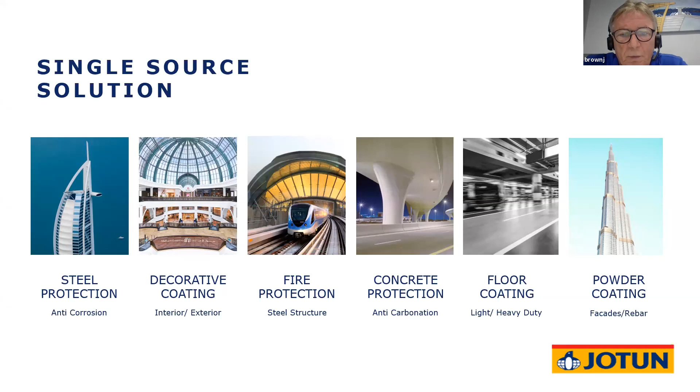So, fire protection of steel structures. What is the purpose of fire protection? Why do we need fire protection? The main purpose of fire protection, the primary functions, are to delay the building collapse, extend the search and rescue time, and preserve the life of the people in the building. The secondary function of fire protection is to protect structure and inventory and prevent a catastrophic failure of the building.

There's many different types of fire protection systems. There's active systems, passive systems, and reactive systems. If we look at active systems, they tend to be the sprinklers or halon systems that are fitted, and they're the first line of defense in a fire.

Passive systems can be vermiculite spray, cementitious spray, fireboards, or mineral wool. Cementitious and vermiculite spray is the most popular used in the Middle East, and these are used behind linings. Very effective and very easy to apply and relatively cheap, but unfortunately very ugly.

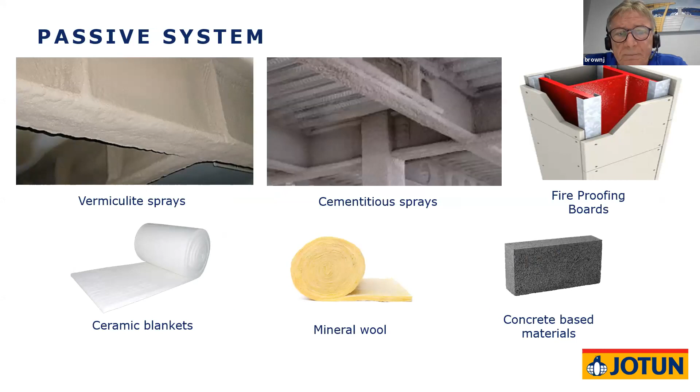So if the steel's exposed, we tend to use intumescent coatings. And then we have reactive systems, which are thin film intumescent for either cellulosic fires or epoxy intumescents for hydrocarbon fires. Today, we'll just be focusing on thin film intumescent for cellulosic fires.

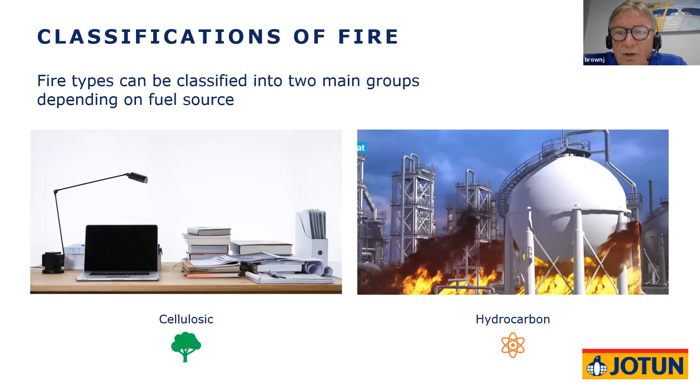A cellulosic fire is one that you would see in everyday buildings. In the office you're probably sat in today, shopping malls, airports - these are cellulosic fires. A hydrocarbon fire is a fire that takes place on an oil refinery or offshore oil rig. And today we're going to talk about fire protection using thin film intumescent coatings.

What is an intumescent coating? The word intumesce is a Latin word and it means to swell. It means the coating will swell and provide insulation to the steel and prevent the temperature rising in the steel.

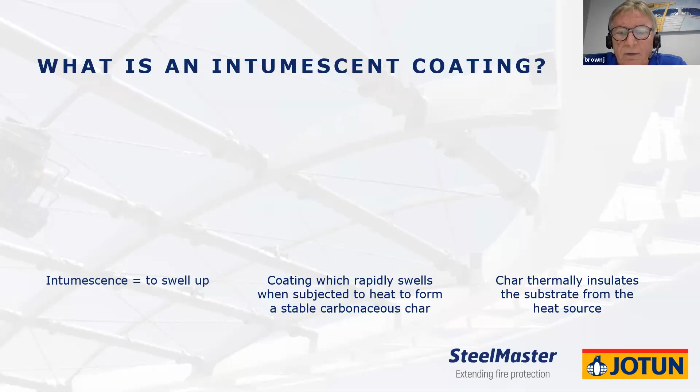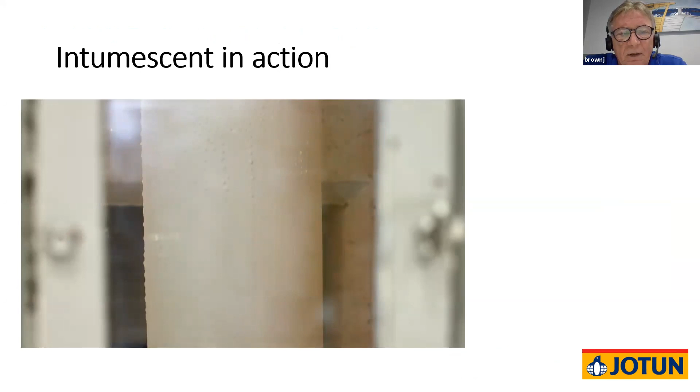Another short video. This was taken from our furnace where we do the fire testing, and you can see the initial reaction is it blisters and pops, and then it starts swelling, and this is acting as an insulation material. It's stopping the temperature of the steel rising.

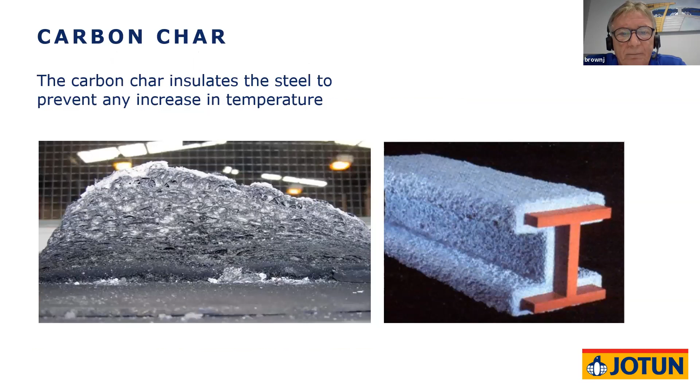After the coating's finished, we're left with something called a carbon char. This is what it looks like after the fire. And these products are used extensively where you've got steel exposed as an architectural feature. Airports, shopping malls, train stations, they tend to leave the steel exposed. And this is where we'd use these products.

If we look at steel, its strength factor starts to reduce at a temperature of around about 550 degrees C. This is called the critical core temperature. So steel at 550 degrees C has lost nearly 50% of its structural strength.

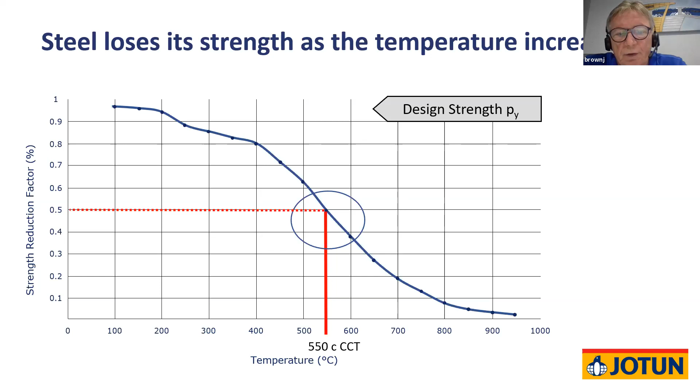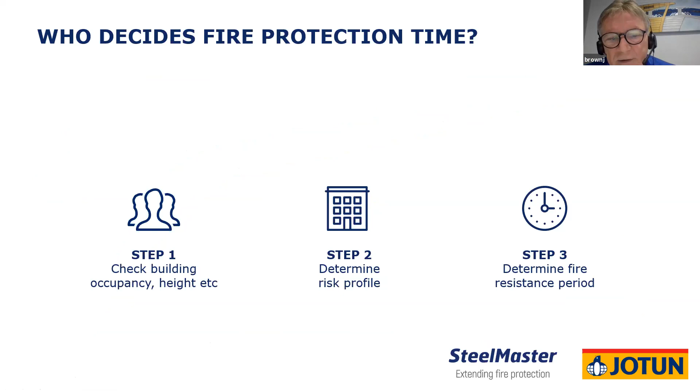Who decides fire protection time? Well, you, the consultants, and the fire engineers decide the fire protection time. In general terms, you look at the building, its occupancy, its height, determine the risk profile, and then give a fire protection period.

Generally, the building codes used are BS 9999, Document B, or NFPA 5000. These are documents that give you tables which will tell you, for example, it's an office building, it's got sprinklers, and it's more than 30 meters high, so it requires 120 minutes fire protection time.

What do we do in Jotun? We also look at the same documents that you look at. We design fire protection coatings to cover the fire protection times. We've got a research and development lab over in the UK, which just recently opened, and in that lab we have R&D furnaces. These furnaces basically will accept 1 meter high, 1.8 meter high columns and beams, and we can do third-party testing.

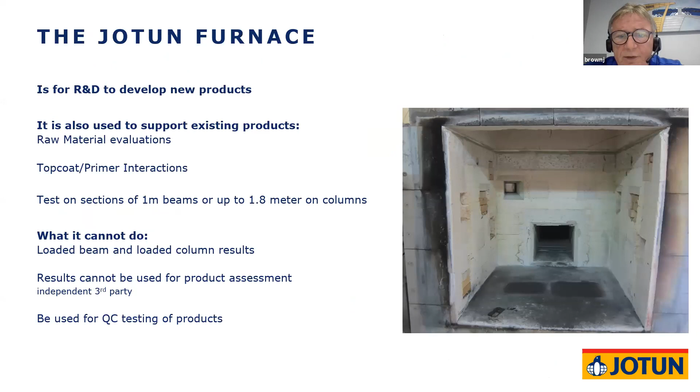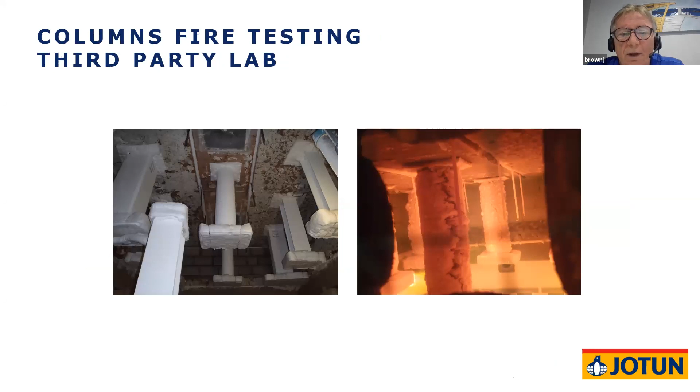Once we're happy that the coating works for a given fire resistance, we then take it to a third-party furnace - you can see it's a much bigger furnace, and the testing is done by a third party. Once that third party are happy that our product performs the way we say it is, they will issue a certificate. The third-party labs around the world are BRE, Warrington, and UL. They tend to be the most popular labs, and they test to BS 476 or UL, which is the American standard.

Once we've done the fire testing and we've got third-party certification, we usually also have to go to local approval level with the local fire department to get the products approved. So these products are very, very well policed by the local civil defence and by third party.

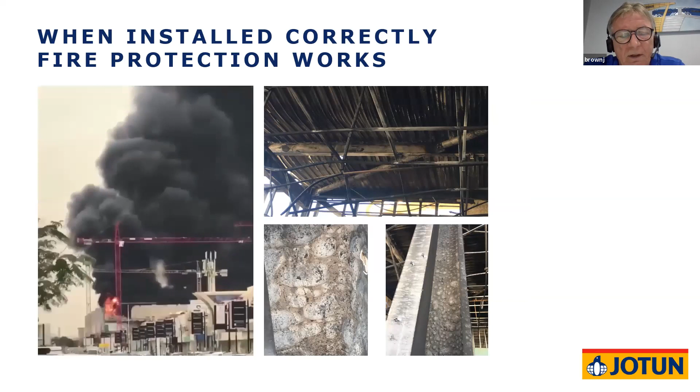This is one taken in your home. This is a shopping mall behind this tower in Riyadh - I'm sure you know which tower it is. There was a fire you can see there, and we managed to get some photos after the fire. It's interesting, you can see the columns have blistered. The products worked in a textbook way.

But more interestingly, if you look up there, you can see the trapezoidal decking has buckled and collapsed as the concrete has broken on the floor above. But if you look at the beam, it's still showing in very good condition. The steel that's bent and warped is the secondary steel, which was probably holding the ceiling up, the false ceiling. So the products have worked absolutely perfectly, and the building could go back into service reasonably quickly.

One thing we're often asked by a lot of people is, can you give a cost per square meter? It's very difficult to do this, the reason being that steel section sizes are very different. And how do we establish the thickness of the coating?

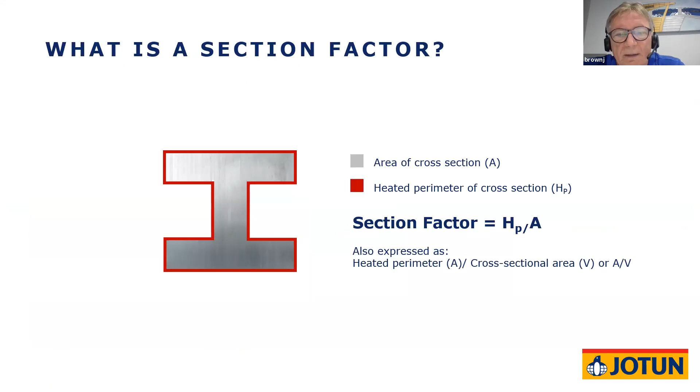If you look there, this is a typical beam, a 75 HP over A. It's a nice, thick, heavy beam. The right-hand side one is a very light beam, probably used on a roof section, and it's 300 HP over A. So we need much thicker intumescent coating on the thinner steel.

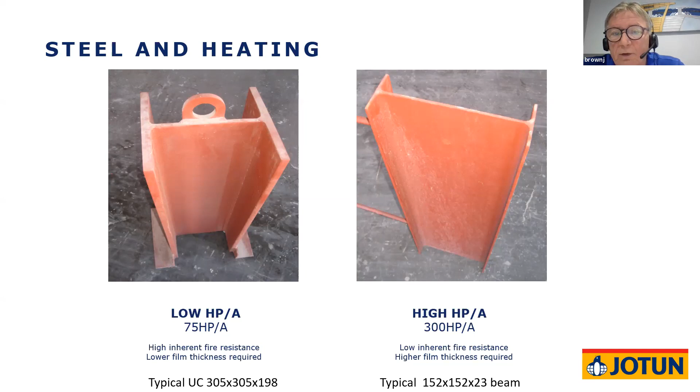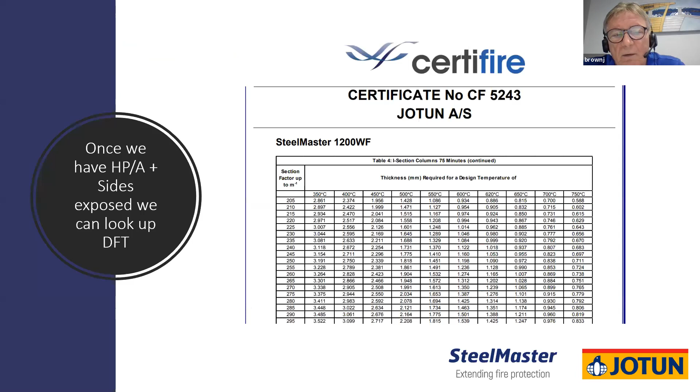We also have a situation where if you have a concrete slab on top of a beam, only 3 sides are exposed to the heat, so it heats more slowly. So the main information we need as a manufacturer is the section sizes and the sides exposed. We can then look at the HPA factor. On the left-hand side of this table, you can see section factor up to m⁻¹, which is the HP over A. Once we have the HP over A, we can work out the exact thickness of the coating.

I'm just going to talk very briefly about fire protection, fire engineering. These are very expensive coatings, but if we engage early with the clients and yourselves, we can look at different types of fire engineering and value engineering to reduce the cost.

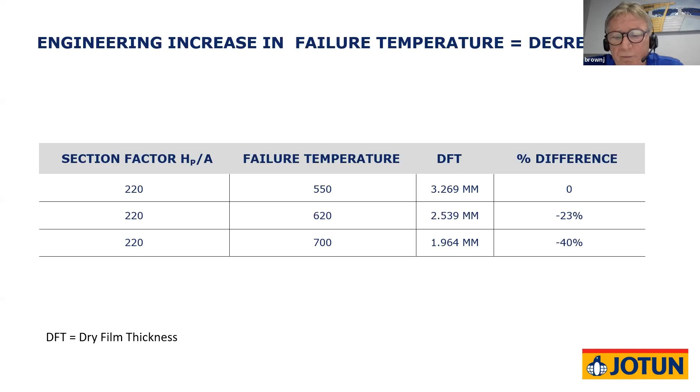The way we do this: we've got a section factor of HP over A 220. If we increase the failure temperature, we can actually reduce the volume of paint required. We drop the thickness from 3.2 millimeter to 1.9 millimeter. But to do this, we need to engage a structural engineer. Be very careful if you're offered a failure temperature above 550, which is standard, if it hasn't been value engineered by a structural engineer.

Now, I understand that we've increased the steel thickness and the cost, but there's a balance sometimes where we can actually use value engineering to decrease the DFT and the time required to coat it. So value engineering is very important.

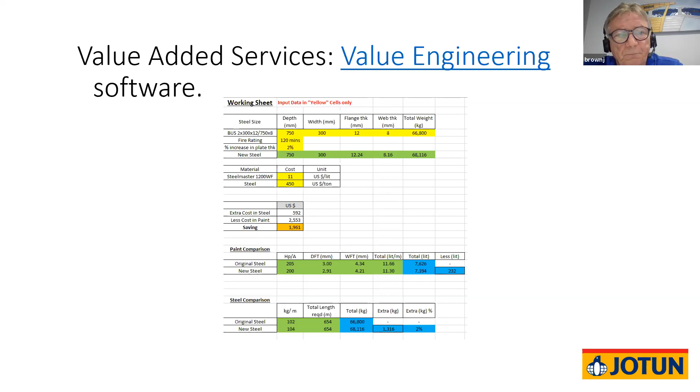This is some software, our own little software we use for value engineering, which we can share with anybody. One other thing we do is we can mark up drawings on any project. These can be used during the project, and after the project can be handed to civil defence.

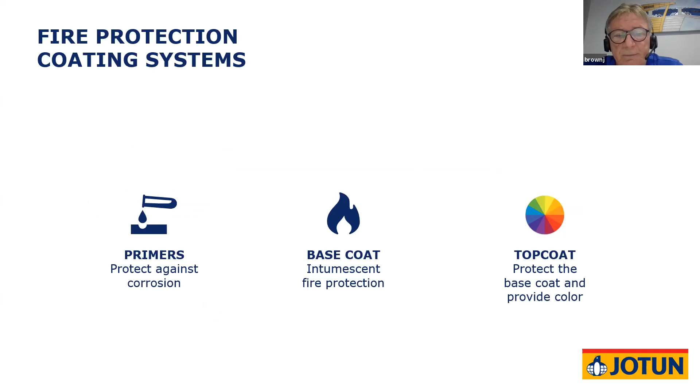Just briefly, we'll talk about coating systems. In an intumescent coating system, you have a primer, the intumescent coating, and a top coat. The primer protects against corrosion, the intumescent protects against fire, and the top coat provides colour and protects the intumescent. That's what it looks like: your primer, your intumescent coating, which is usually white, and your top coat.

On the primer systems, we accept that steel is sometimes fabricated overseas, so we just say make sure it's a good quality epoxy primer. But on the top coat, it's important for specifiers out there that you specify the same top coat as intumescent. On the left-hand side, you can see a piece of steel with the same primer and intumescent. The right-hand side is the same primer and intumescent supplier, and it's a nice even char. In the middle, you can see areas where the paint has not swelled, it's not expanded, because it's not worked with that particular top coat. The top coat's prevented it. So make sure if you specify, you always specify the same manufacturer for top coat and intumescent.

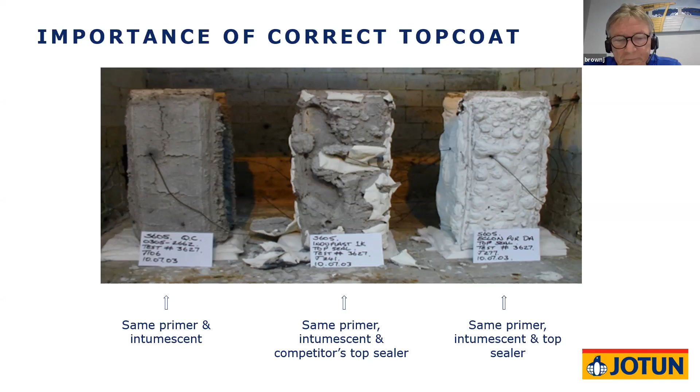These systems contribute to LEED v4 and give 2 potential credits. And we've got fire protection systems between 30 and 180 minutes that are LEED v4. Generally, these products are applied on site. It's a trend, certainly in Europe, to have them applied off site, but in the Middle East, because we've got reasonably good weather, we can apply them on site.

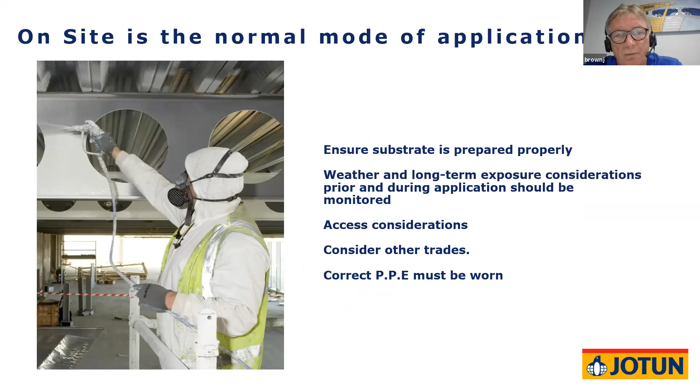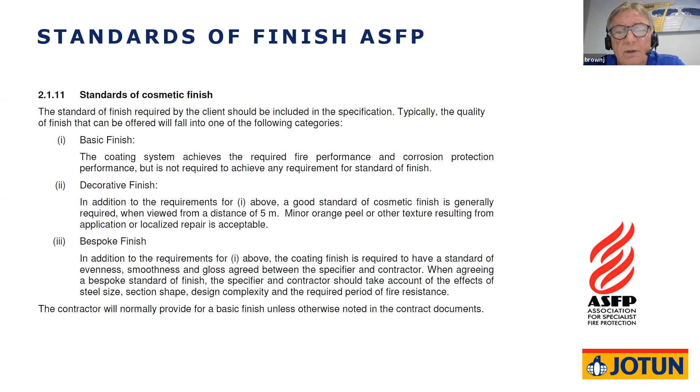One of the problems you can get with these, because of on-site application, is poor cosmetic finish. Again, for the specifiers, we recommend that you are careful when you specify. There is something called the ASFP, Association for Specialist Fire Protection, and they issue a document on the standards of cosmetic finish, which talk about a basic finish, a decorative finish, and a bespoke finish. It's always good to have in your specification these different standards of finish, so everybody knows and understands. And we always recommend on-site mock-ups prior to commencement of the fireproofing project.

We've also written some NBS and CSI format specifications, which we will give to anybody who wants them. And these specifications use the best and latest terminology. And as of today, we do CPD training, and we've got courses available in this one. If anybody needs a certificate for this, we can issue a certificate from RIBA. We've also got various other CPDs that we can offer directly.

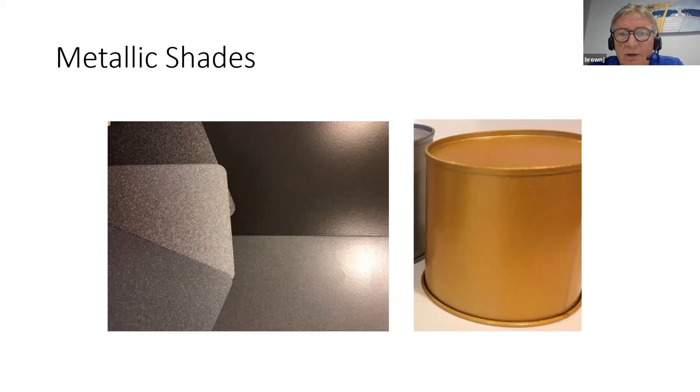Just very briefly, we said we'd give you a little bit of an insight into what's coming. The latest thing that we are launching in Jotun is metallic shades. We asked architects and consultants what they're looking for, and many came up with these metallic shades as a wish. So we're launching these metallic shades at the moment. There you can see there's a lot of different ones, from gold, silver, bronze, and aluminium.

So to conclude, and thank you very much for your attention, intumescent coatings rely on complex chemistry that requires third-party testing. There are significant costs, as we've seen, up to 15% of the cost. Selecting the right manufacturer, product and value-added services can reduce the cost substantially. We saw some examples of up to 50%. If we engage early together with the consultant and the main contractor, we can offer some big savings.

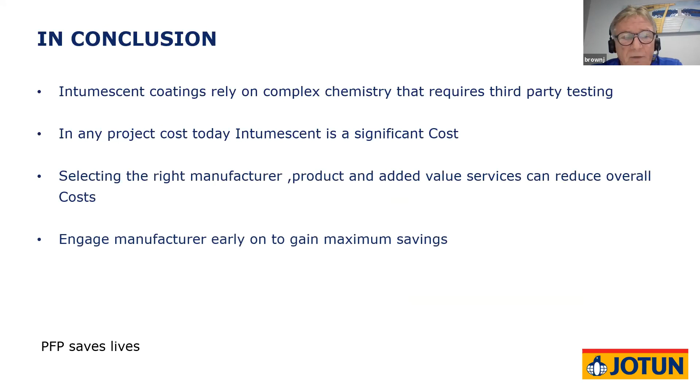And our two products are known as probably the most efficient in the market, with more than 8 million square meters of steel coated since 2009. Where we can help is value engineering. We offer a single source solution. We've got excellent site supervision, and we've worked on most of the big airport and transport systems in the Middle East. We've just got a few slides of projects here that we've completed.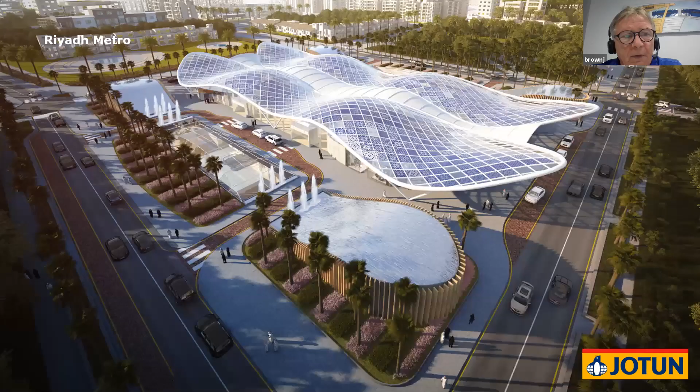Riyadh Metro, I know some of you are in from Riyadh, that's coated exclusively with Jotun. Dubai Opera, Cairo International Airport, the terminal there. The midfield terminal at Abu Dhabi, Dubai Metro, Haramain High Speed Railway, Bahrain City Centre, and King Abdullah Financial Centre.

Okay, thank you. My colleague now, Mr. Niru, will take over and take you through floor coating. Thank you.

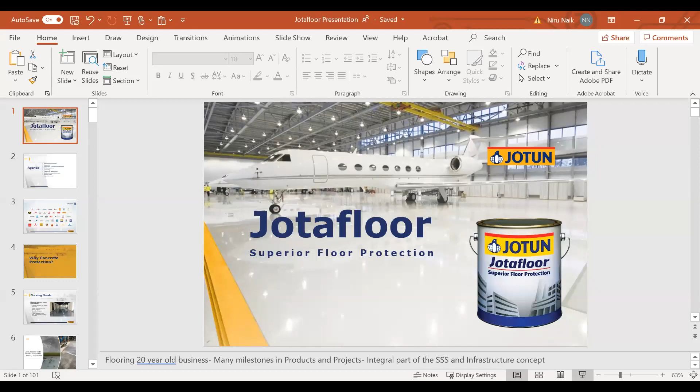Our floor coating business is 20 years old, and during this period, we have achieved some significant milestones in terms of number of projects as well as our product portfolio itself. And floor coating is an integral part of the single source solution and the infrastructure concept, where intumescent fireproofing is also a part of the whole infrastructure concept.

Let's just go through the agenda first. Today we have why concrete protection, what kind of usage areas we have, classification of systems and technology, surface preparation, and what is our policy towards floor coatings and how we run this category. Products and its application. Although we have a significant range, we will today choose a few products that are in current days trends, specifications and market trends, industrial floors, and a few project references.

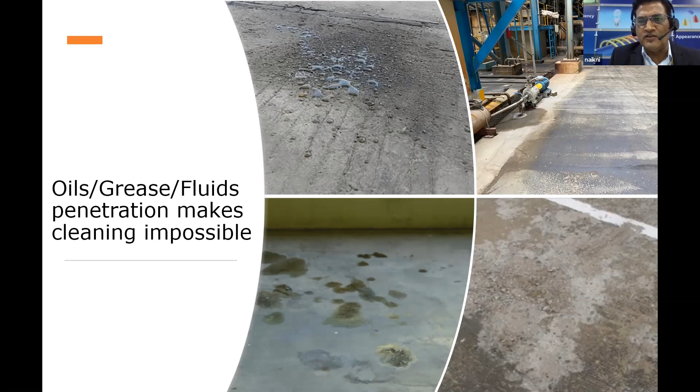The other aspect of floor coatings or concrete protection is there's a lot of ingress of corrosive elements like moisture, carbon, and chlorides from the atmosphere. All these react with the substrate, and a naked concrete substrate allows these elements to permeate into the concrete. It is believed that every year a concrete structure that is exposed can lose about 1 millimeter of concrete cover. So that means in 10 years time, you lose 10 millimeters of the cover itself. And once the cover is exposed, it starts to attack the rebars, which are below the concrete substrate.

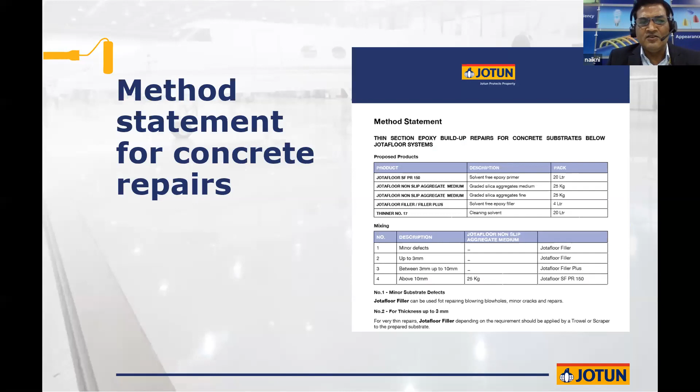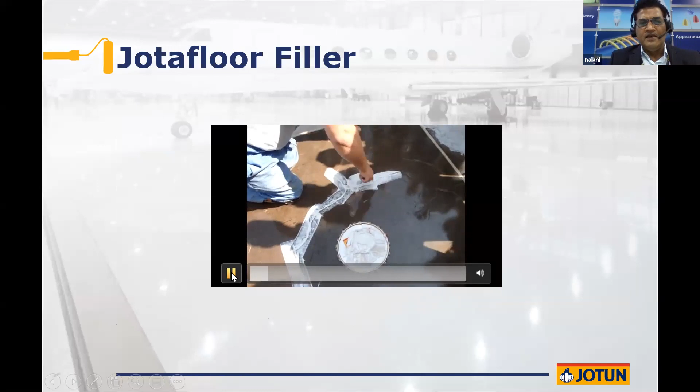So let's go to the first product, the JotaFloor Filler, which can fill up to a width and depth of 3 millimeters. It's a solvent-free, non-shrinking, non-slumping epoxy filler with a very high compressive strength. Just to show you a video as to how it's used, it's a 2-component product. And you can see here, after the primer has been applied, he's using the filler to fill all the cracks.

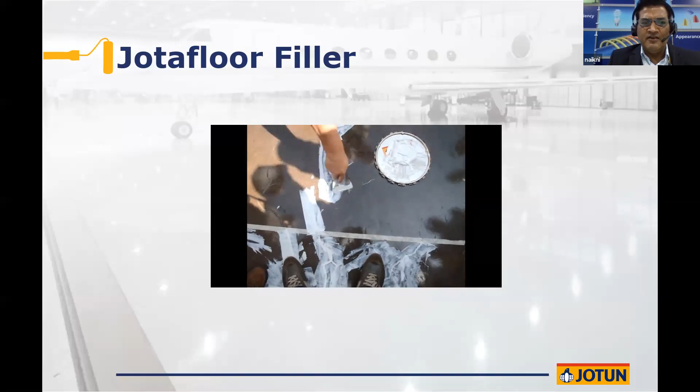Similarly, we have JotaFloor Filler Plus. This product is based on similar lines, but it can fill to a greater depth and greater width, 3 millimeters to 10 millimeters. This is also a solvent-free epoxy. It's non-shrinking, non-slumping. So what we mean by non-shrinking and non-slumping is when it is applied in its wet state, it stays the same in the dry state.

Usage areas. When it comes to car parks, we have typically residential car parks, public car parks like malls and public parking spaces, and commercial and residential buildings like hotels, office buildings, office towers. All these three are divided into three areas, namely the parking bays, the driveways, and the ramps. And some public spaces have something called the roof deck as well.

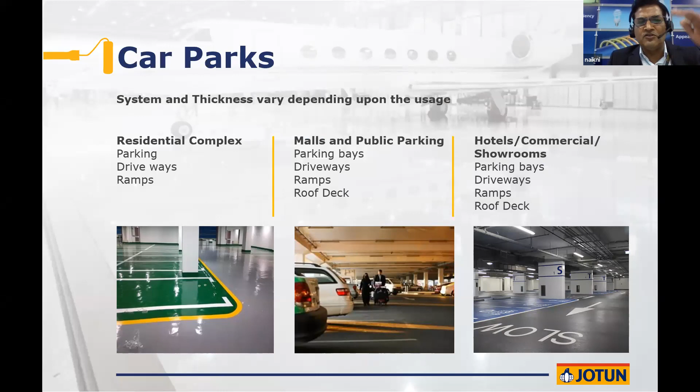If you take the industrial flooring, the factories, warehouses, loading areas, storage areas, production units, manufacturing areas, storage areas again, assembly units. Then you have the back of house, the support areas, corridors, and then you have typically chemical plants or chemical storages, laboratories, etc.

Then we come to the classification of systems and the basic technologies that go into it. Although there are many types of technologies, there are water-based, emulsion, alkyd-based, epoxies, polyurethanes, and many other types. By and large, most aspects of floor coating revolve around epoxies and polyurethanes. Epoxies, because they are not cheap, but they're cost effective. They have good chemical resistance, good abrasion resistance, and good impact resistance. And that's why you find largely industrial floors have epoxies.

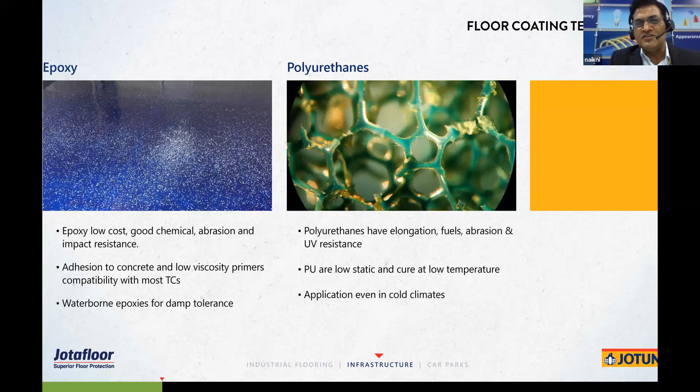Secondly, the bonding between epoxies and concrete is excellent, and that's why most floor coating systems have primers made of epoxies. Polyurethanes are generally used in situations like car parks because car parks require coatings that are more flexible, tensile, have elongation properties, have resistance to fuels. And polyurethanes are also adaptable, more suitable to low temperatures, particularly cold temperatures. And you will see polyurethanes are largely used in car park situations.

All our products are tested by third-party labs, international labs, and we have a range of certificates for all properties that cover floor coatings, be it mechanical properties like compressive strength, be it MPI standards, be it food and beverage, or hygiene coatings. We have our products tested thoroughly by third-party international labs.

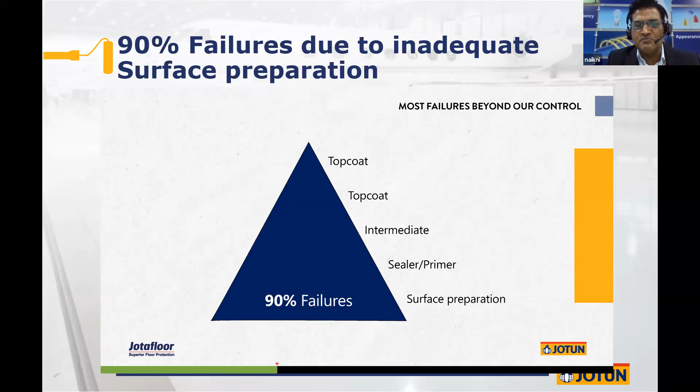Surface preparation. This is an important part of all floor coatings because the survival of all floor coatings depends largely on surface preparation. And although we don't directly control surface preparation, our product's existence depends largely on surface preparation. That's why we are focusing today on different types of surface preparation involved in application of our floor coatings. You can see on this pyramid here, we supply almost 80% of the whole pyramid, but 90% of all failure happens because of inadequate or poor surface preparation.

So let's go into a small video where we are actually laying a floor. This is a power floated concrete floor, and you can see it's a very good quality floor that is being prepared. What you see is a helicopter trowel in motion. And once this is cast, after it cures, applying a coating directly on this would mean that the floor coating laid on the floor is going to be exposed to a lot of danger.

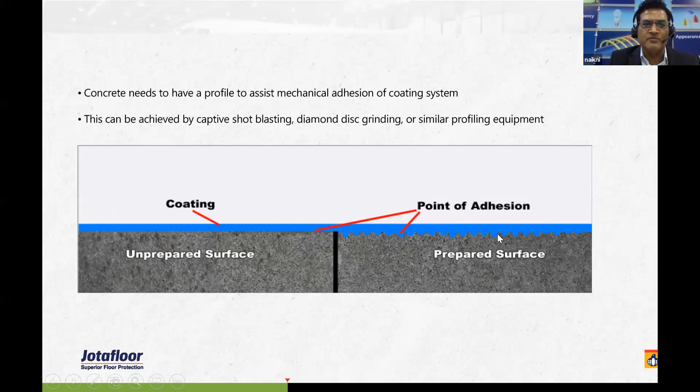That's why, between the two images on the left and the right, what we are doing in surface preparation is basically creating a profile to anchor the whole floor coating system. There are different ways. The most preferred method is the captive shot blasting method, where steel shots are fired at high intensity onto the substrate, thereby eroding at least a millimeter on average of the top substrate, and at the same time creating a profile so that the coating system can anchor itself on the substrate.

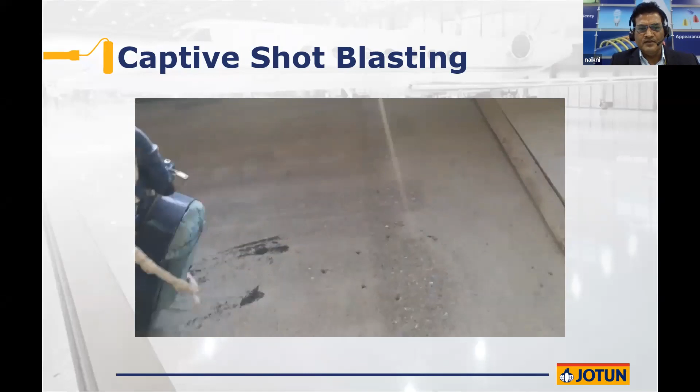Now you can see very clearly as we go closer, there's a clear profile being created on the concrete substrate. This is called the captive shot blast machine system, captive shot blasting method.

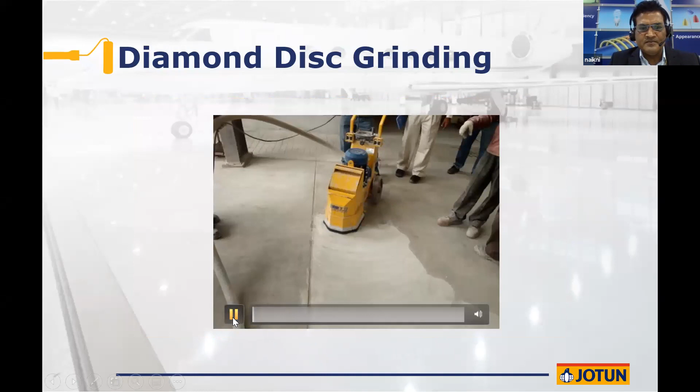The other is the diamond disc grinding method. Here, it's a similar method, but the functionality is quite different. What they are doing is using a diamond cutting disc that basically shaves off the profile of the concrete from the top, at the same time creating grooves or a profile to anchor the coating system. So it's basically cutting or shaving the top as well as opening up the pores.

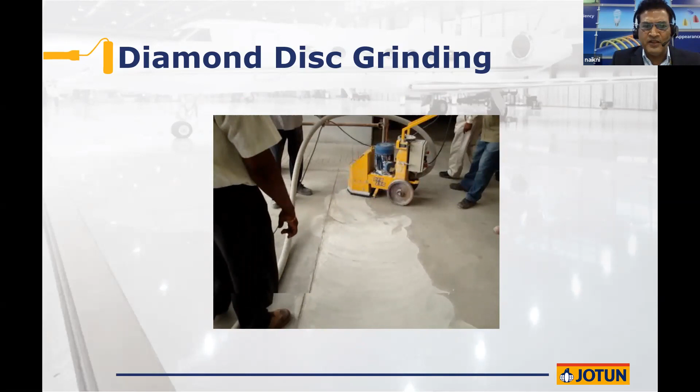There are other methods, but these are the two most preferred methods in today's floor coating business. Jotun policy. What is our policy towards this business? Basically, we are quite unique compared with other suppliers. We are involved in surveying the concrete floor business, concrete floor substrate, selection of the material, helping in the application, and also surface preparation is something that we supervise directly.

All applicators that we engage to apply our products need to be trained by us. And then we certify each of these applicators so that the project owner or the client is satisfied that our products are being applied by the right people. Why do we do this? Because the risk involved in most floor coating projects is very high. The cost of the products is very high, and the prospect of closure of the premises is something that nobody

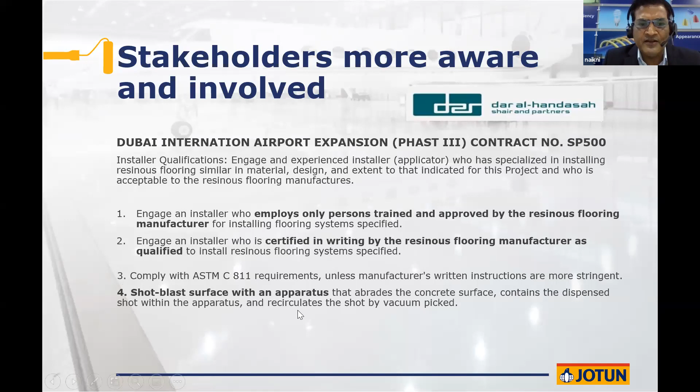wants to think of. That's why most stakeholders, architects, consultants are today more aware of the whole floor coating process. And that's why you have in quite a few specification documents the clear definition of the supplier having trained persons and certified supplier having the right qualified people to do it. That even mentions the type of apparatus that is used in surface profiling or surface preparation.

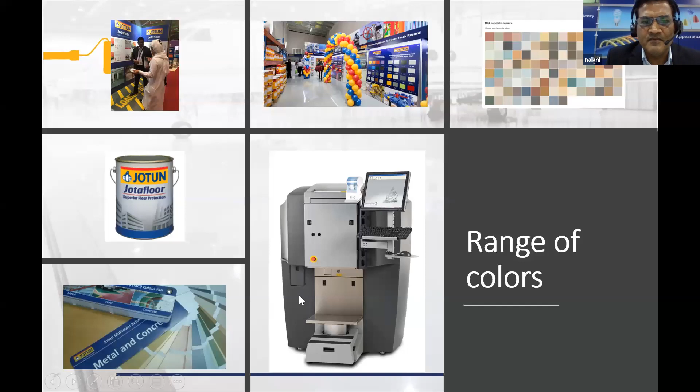We would like to highlight to you Jotafloor Topcoat E. It's a premium top coat, solvent free, as you can see, with 100% volume solids. It is largely used in industrial floors. I'd like to show you a small video. It is normally applied by roller or can be applied by spray as well.

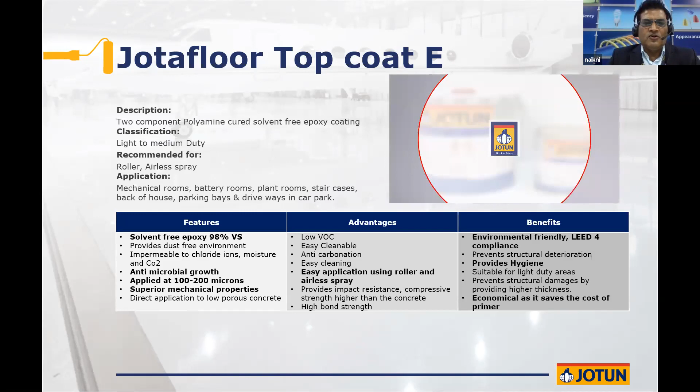Jotafloor Topcoat E is quite unique because it also has antimicrobial properties. It is normally applied between 100 and 200 microns. That means it's about 20% of a millimeter per coat. It has superior mechanical properties, provides hygiene. It is an environment-friendly product, so can be used in LEED projects and green building solution projects.

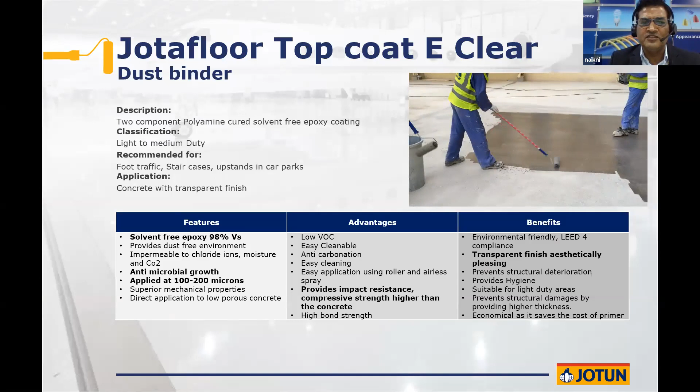Then we come to another product called Jotafloor Topcoat E Clear. This is basically a clear version because there are projects where they want to retain the original look of the concrete. It's a similar product, but without pigments. It is also 100% solids, antimicrobial, can be applied between 100 and 200 microns. It's a transparent coating. This is what it looks like when it's applied on a concrete floor. Basically, it offers protection, but gives you the original look of the concrete in itself.

And if you look at a fully executed project, this is what it looks like. They want to retain the original look, but also offer the floor a decent level of protection.

Now we come to the current market trends and what these specifications involve. Let's come to car park solutions. Basically, a car park is divided into three areas: underground car parks, basements, not exposed to the ultraviolet rays or the sunlight. Then you have the roof deck, which is separate from the basement, and these you generally see in large infrastructure projects like airports, metros, and some high-profile shopping malls.

If you take a normal specification of a car park, you will find most specifications will be the same across all these areas. But what we have done is kind of value engineered these areas differently. For example, in a parking bay where the car comes and stands in a still position and there's not much movement, you don't require a very sophisticated specification. You can just go with 260 microns of primer and top coat.

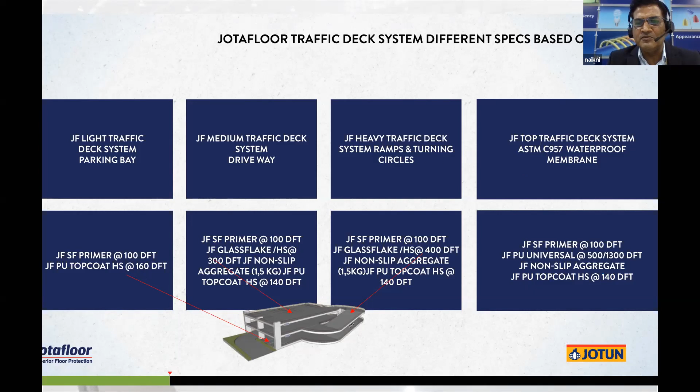This way, from the total budget allocated to the car park, you could end up saving actually 30–40% instead of using one specification across the three areas of the car park. Then you have a fourth type, a new ASTM C957 compliant traffic deck system, which we will go into in slight detail today. It's a polyurethane based system providing both waterproofing properties as well as high elongation and crack bridging ability.

How we start these systems, we have a common primer, a solvent-free primer. We call it the solvent-free primer 150. And then we apply the membrane. The membrane is a glass flake high solids, normally applied between 300 microns to 400 microns, 300 microns on a driveway and 400 microns on the ramp. And these are environmentally friendly products, so they are LEED compliant. They can fit into any green building specification.

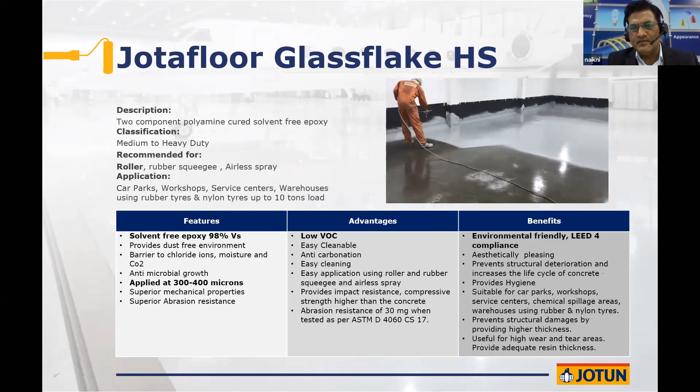I'd like to show you a video. This is applied here by airless spray, but it can also be applied by roller. What is unique about this concept? This concept has been adopted from our Scandinavian parent company, where this technology was used in ice-breaking ships' hulls. So these ships used to have this similar technology painted on the bow of the ship, where it is used to break the ice as they maneuver into the waters.

The same technology was adapted to floor coatings, and if you take a cross section, this is what it looks like. Basically, the glass flakes, which actually look like fish scales in a way, reinforced in an epoxy resin. So when it's reinforced in this epoxy resin, it provides, once it cures, a brilliant layer which provides excellent chemical resistance, impact resistance, and abrasion resistance.

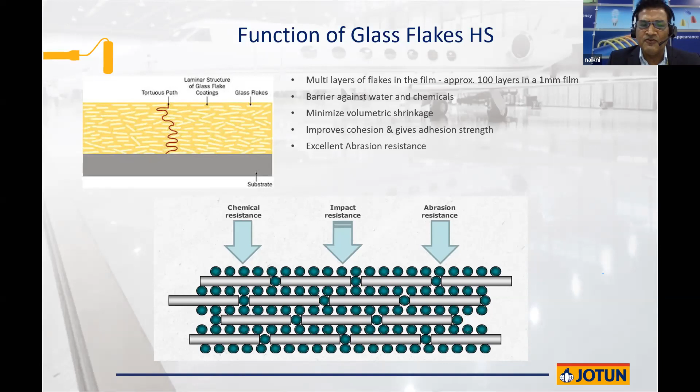Approximately, you have 100 layers of glass flakes in 1 millimeter of DFT coating. So if you apply a 300 micron membrane on a car park, you have about 30 layers of reinforcement of the glass flakes. So it's a very robust kind of protection that you provide to the car park. It's quite unique to us. We have a number of years of experience with this. As you can see in this next picture, this is a 500 micron coating used in a Caterpillar workshop, and you can see huge equipment standing on a very bare minimum thickness coating of glass flake.

Then we use a top coat, particularly on exposed areas, because the membrane is an epoxy. It cannot be exposed to UV, and all epoxies exposed to UV will generally chalk over a period of time. So you have to use a polyurethane top coat, generally applied in 2 coats, and on ramps, sometimes we recommend 3 coats. This is a medium solid 63% PU top coat called the polyurethane top coat Jotafloor. And this can be tinted in 165 colors.

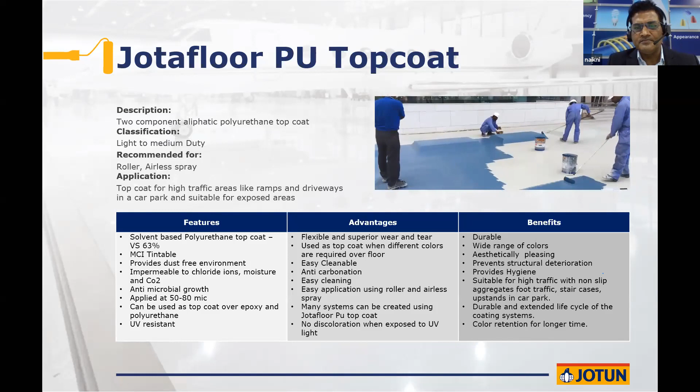I'll show you a video where it's applied. Normally applied by roller, can also be applied by spray. And what the guy on the left is doing is actually broadcasting silica aggregates onto the substrate to create a non-slip profile in the top coat.

Then you have a high solids version of the same thing, where it's 91% solids polyurethane, again tintable in 165 colors. This is a more advanced version. It's also aliphatic. That means it can be exposed to UV. It is applied between 75 to 80 microns per coat. And normally we recommend 2 top coats on normal areas and 3 top coats on ramps.

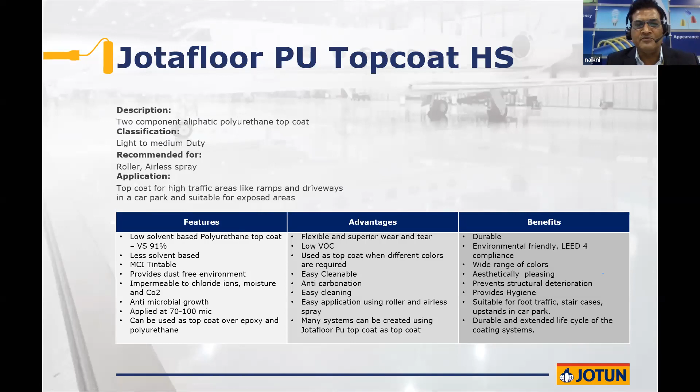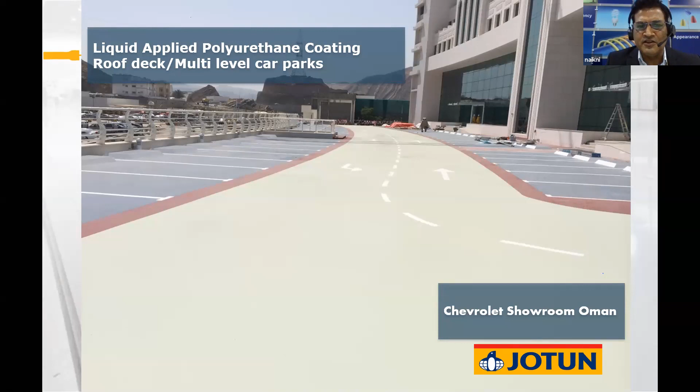This is a specification which clearly defines the use of this elastomeric waterproofing membrane, which is high solids, and compliant with the specification called ASTM C957. This spec basically says the membrane should have an elongation of greater than 90%, should be applied at minimum 500 microns or half a millimeter, bridge cracks in excess of 1.6 millimeter, and abrasion should be, minimum, the weight loss in the abrasion property should be less than 50 milligrams.

That means every 1,000 cycles, the wearing of the coating should not exceed 50 milligrams. So you can see here, the specification clearly states that it has to comply with the ASTM C957 standard.

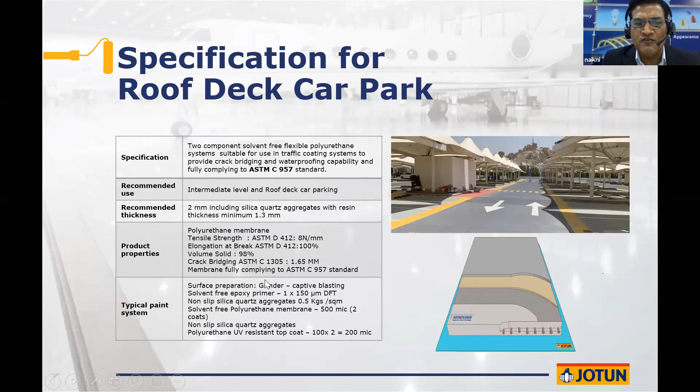What we offer here is a membrane called PU Universal. And if I just go back here, this is what the membrane looks like. It has an elongation property of 120%, that means almost 20% above the standard itself. It's 100% solids, provides a dust-free environment.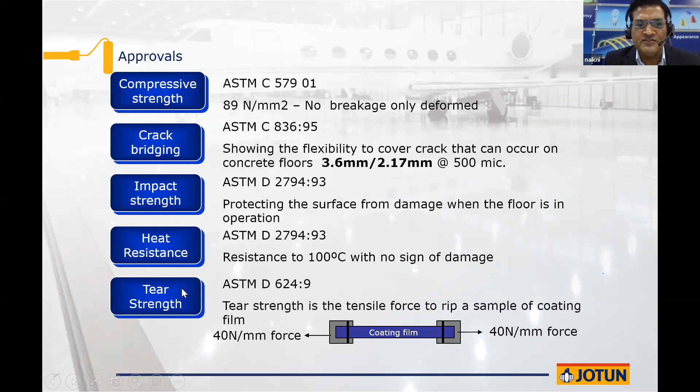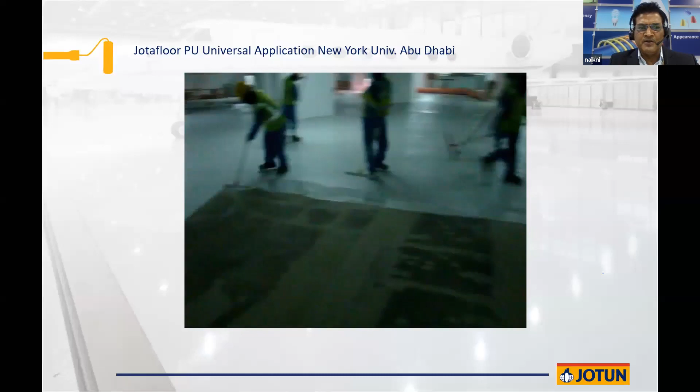I would like to show you a video of a real-time application of this product on Abu Dhabi's New York University. So they have applied the primer, now they are applying the membrane, the PU Universal. This is being applied at 500 microns.

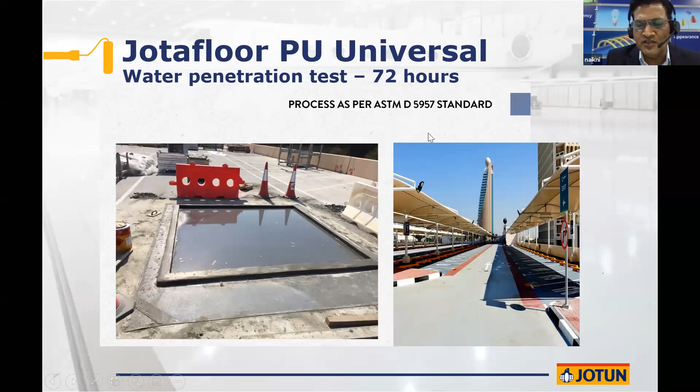Then this is a project we did for the Al Futtaim group, the city center malls in Oman, where they wanted to test our product to see its waterproofing ability. This is a 72-hour test done as per ASTM D5957 standard to see its water prevention or water penetration properties.

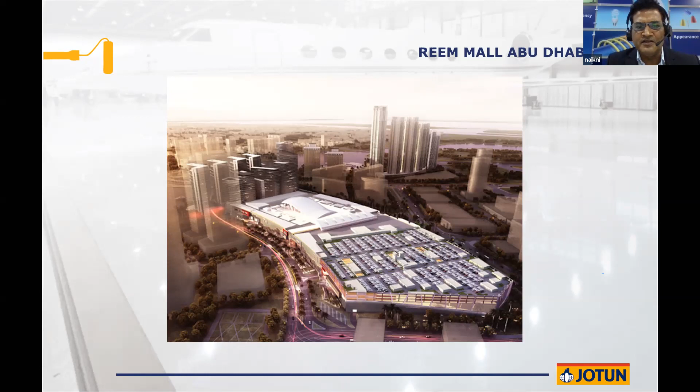Then we come to the commercial buildings and car park coating systems, plus back of house areas in industrial flooring. We have a product called EPC 300. It's an epoxy coating which can be applied at an average of 300 microns, the recommended thickness. One of the unique features of this product is that it is solvent free, of course, but it can be applied without the use of a primer, provided the substrate is well prepared. You can see in this video, he's applying it directly on concrete.

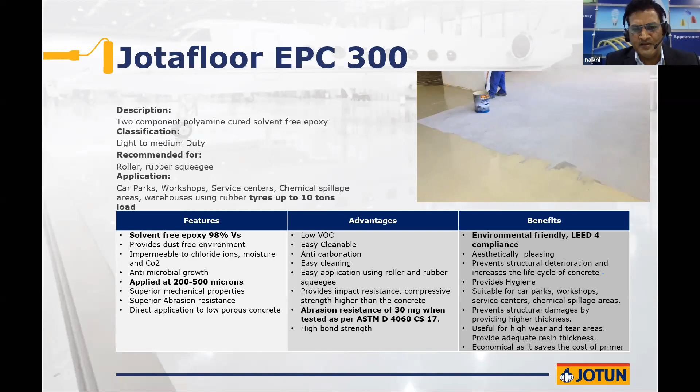It also has antifungal and antimicrobial properties. It is LEED compliant, can be used in green building solutions as well. One of the famous projects where we used this was the car parks in Abdali Mall in Jordan, the largest mall they have there. The Sobha Sapphire building, Dubai - this is again used in a car park. The Al Rayyan Stadium in Qatar, which is going to be used for the soccer World Cup in 2022. Harley Davidson showroom.

That was EPC 300. Then we come to the next topic, that is industrial floors. Industrial floors have a different kind of need. These are projects that will involve large storage areas, loading areas, unloading areas, manufacturing units, assembly units, corridors, chemical plants, laboratories. So the need is quite different.

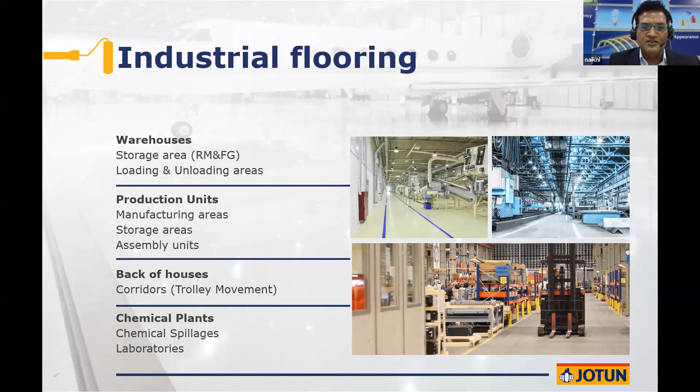Generally, the coatings need high impact resistance, high chemical resistance, high abrasion resistance, and are normally applied at a DFT, or dry film thickness, of 3 millimeter. So we have a very unique product here. It's solvent free with nearly 100% solids, a barrier to chlorides and moisture, antimicrobial growth, and applied up to between 1.5 millimeter to 5 millimeter. It has an abrasion resistance of only 30 milligrams per 1,000 cycles when measured under the CS17 category of abrasion resistance, ASTM D4060 standard. This is a video how it's applied.

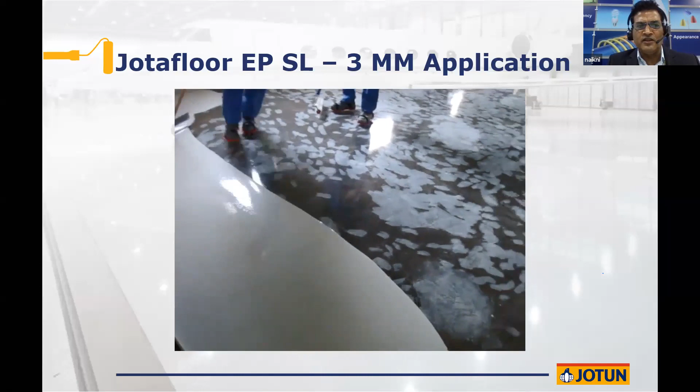These are heavily filled products. We mix them, pour them on the floor, and then use a trowel or a rake to spread it. The wet film thickness means the wet coating and the dry coating have the same DFT, because it's solvent-free and nothing evaporates from the coating.

Here we are applying it after the primer. You can see the primer is applied and then it's filled with a filler to level the surface, and then we apply the coating.

It has a compressive strength of 74 Newton, which is almost 2.5 times the normal compressive strength of concrete, a Shore hardness D of 75, which is extremely high, and it's antibacterial and chemical resistance certified.

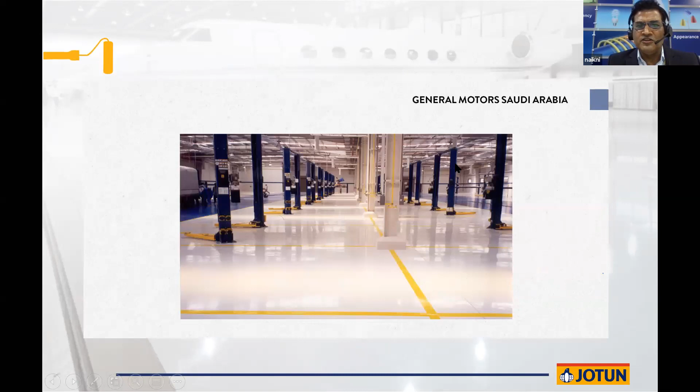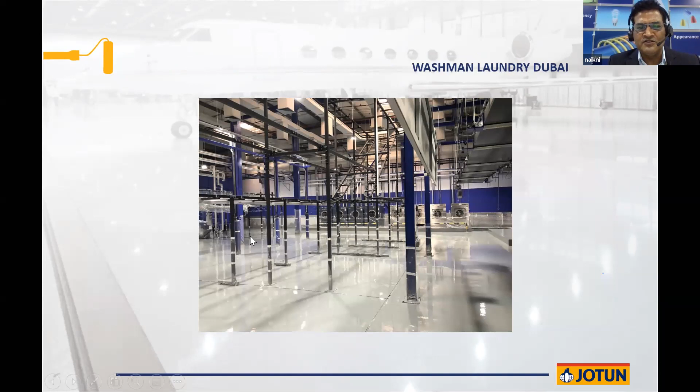Then we come to another product that we have just launched. It's called the process industry solution, for food and beverage, pharmaceuticals and cosmetics. This is a product made of polyurethane binders, and it is certified based on Hazard Analysis Critical Control Point, in short called HACCP. It's a worldwide certification program, essential for high hygiene sanitary areas like food and beverage, pharmaceuticals, and alcohol production, where a high degree of hygiene is required.

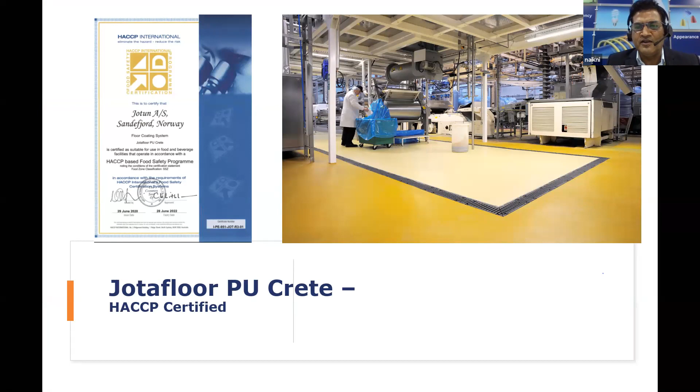This is a seamless, self-smoothing, solvent-free polyurethane, and it's a hybrid technology with antimicrobial features in it.

Let me just show you a video. It's also applied similar to the epoxy which you saw in the earlier video. We mix 4 components, pour it on the floor, and it's applied by a rake and back-rolled by a dry roller.

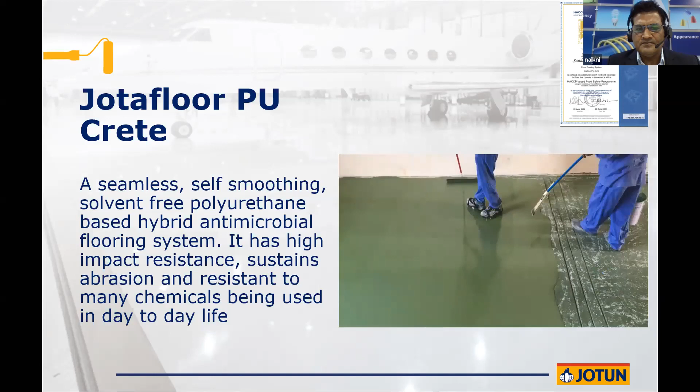This is a very robust product, usually used in food and beverage, kitchens, pharmaceuticals, cosmetics, electronics, confectionery, and textile. It is antibacterial, seamless, matte finish, solvent-free, high impact, non-tainting or non-staining, withstands very high abrasion, and can resist a huge range of chemicals, and it can also be exposed to steam cleaning on a regular basis.

It has a number of unique features: compressive, flexural, tensile, impact, water permeability, slip resistance, Shore hardness, abrasion, chemical resistance, and temperature resistance. Its volatile organic compound content is only 69 grams - anything below 100 is low VOC compliant.

This is a video of how the coving is done on a corner. This is the skirting, as you call it, at the edges and perimeter of the walls, so that there is no contamination or any growth of fungus or bacteria at the periphery of the floors.

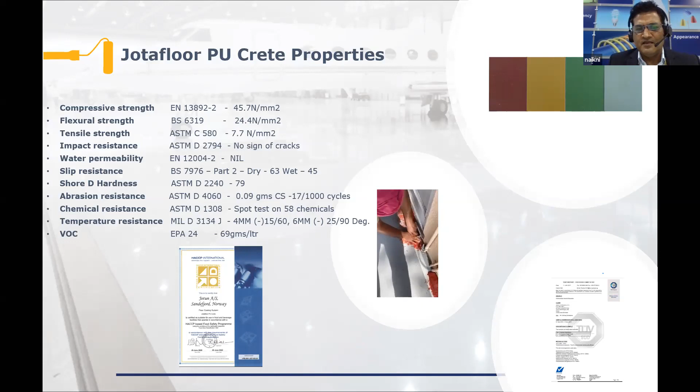So it makes the floor a seamless entity between the floor and the edge of the wall.

That was the floor coating part. Of course, we have a range that is much beyond this, but because of the time constraint, we had to make our presentation today within the 1 hour period.

So I hope we are able to deliver the message that we are a comprehensive solution provider when it comes to intumescent or steel fire protection, as well as floor coatings. These are two components of the infrastructure concept, which is very, very important these days, and most of these infrastructure projects combine these two elements quite significantly.